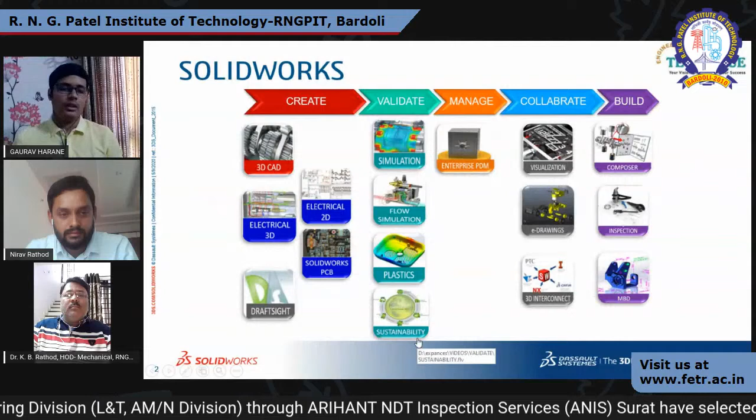So what is SolidWorks? SolidWorks, as we all know, is a very renowned software for 3D CAD modeling. Also, it has Electrical 3D, Electrical 2D, PCB. Then for validation, it has Simulation, Flow Simulation, Plastics, etc. So it is a bundle of different modules which are available. Then we have Manage, to manage all the 3D files and 2D drawings. Then Collaborate, that is Visualize and e-Drawing for creating high quality rendered images. And finally Build, that is if you want to inspect any 2D drawing, or create good marketing reports, so Composer, etc. So there are various modules available in SolidWorks.

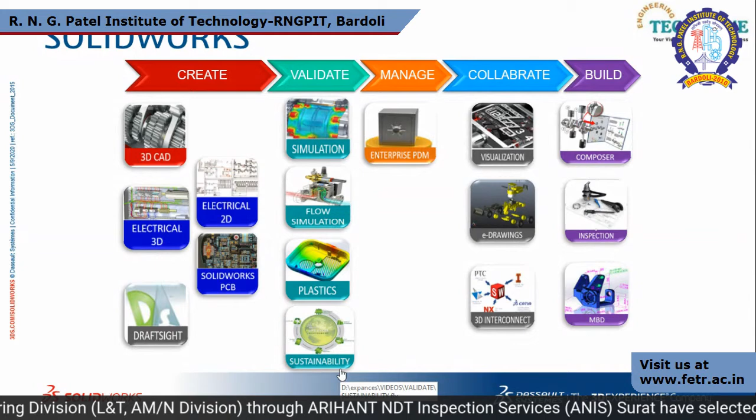So in today's webinar, I will be covering a few of them, like 3D CAD modeling. I will start with 3D CAD, then go into the importance of validation, in which I will show practical case studies which I have done with some customers. You will get a good knowledge of it, and so on.

So, SolidWorks 3D CAD - the power you need to drive innovation. It is a 3D mechanical CAD software, a parametric feature history based modeler. What does this parametric mean? I hope all of you have used SolidWorks in your college. So the 3D CAD software is very user friendly.

Besides 3D CAD, part modeling, 2D modeling, and assembly modeling, it also has industry specific tools like sheet metal, weldment, mold design, surfacing, etc. If a company deals with sheet metal industries, apart from part assembly drawing, it uses sheet metal or weldment. If it is in the mold industry, core cavity, then it uses mold design, etc.

So let us move forward. I will showcase a few of the great functionalities of 3D CAD. This is a simple model of a miter saw, which is used for cutting pipes.

I will jump on to SolidWorks. So this is the model, made up of various sub-assemblies and various parts. Let me showcase a few of the movements which are created.

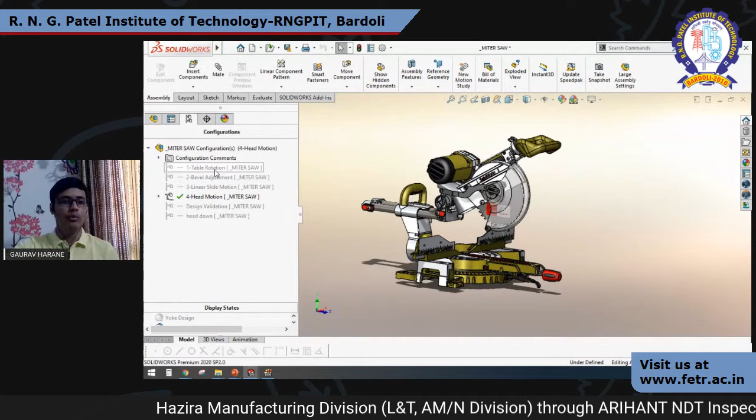Like table rotation, you can create such kind of movements also, which are called configurations. If you want to showcase how this table is going to move, or show how the bevel adjustment is working, the head motion, etc. These are called configurations which can be done.

Now let me quickly highlight the important part in this whole assembly, this yoke part, which is connecting the bevel adjustment to this cutter. This is the part I have chosen, in which I will showcase how quickly we can create such designs.

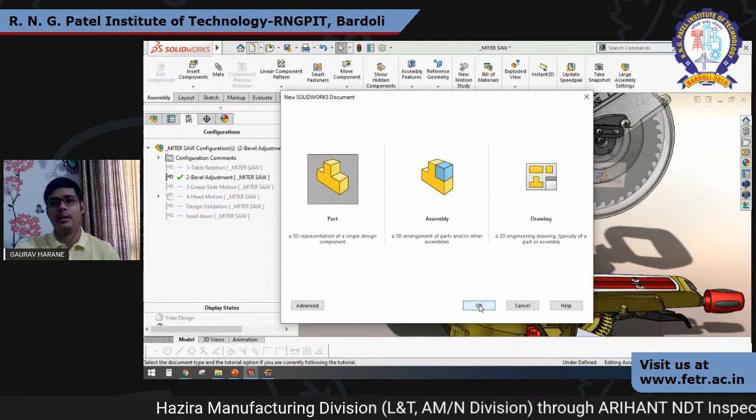We all know we can do part extrude cut, we can draw sketches, so I will not cover those conventional methods of modeling. I will use a few great techniques or shortcuts by which you can create your part modeling in a faster way. SolidWorks starts with part, assembly, and drawing.

So I will go to the part and select the plane on which I want to start the sketching. Now let me use these 2D entities. As we all know, SolidWorks has all the types of 2D entities, starting from circle, rectangle, square, polygon, etc.

So I will start by creating a center line, then provide dimensions to it. SolidWorks also has a great tool to give dimensions which are fully defined. Most of the time, when you try to create a sketch, you sometimes forget to fully define it. Fully define means you forget to give certain dimensions to it.

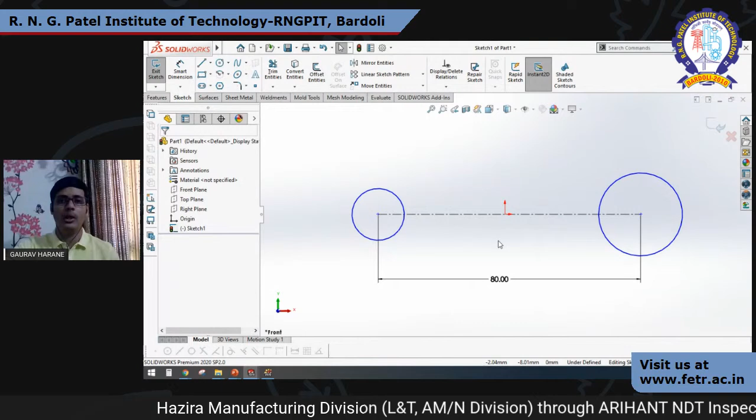That's why it belongs in underdefined criteria, shown in blue color. I have not given a radius to the circle, so it is blue in color. Whenever you do any of your modeling, it is important to give the perfect dimensions so that it is fully defined and no other dimensions are missing.

There is also a list of relations which are available. So if you select entities, like I have selected two circles, you can provide relations to it, like the equal relation I have provided.

Now moving on further, I'll create one more entity and complete my 2D sketch. You can also see at the bottom that an underdefined option has popped up, meaning all the dimensions are not provided. See, the rectangle has turned black in color, meaning it is fully defined.

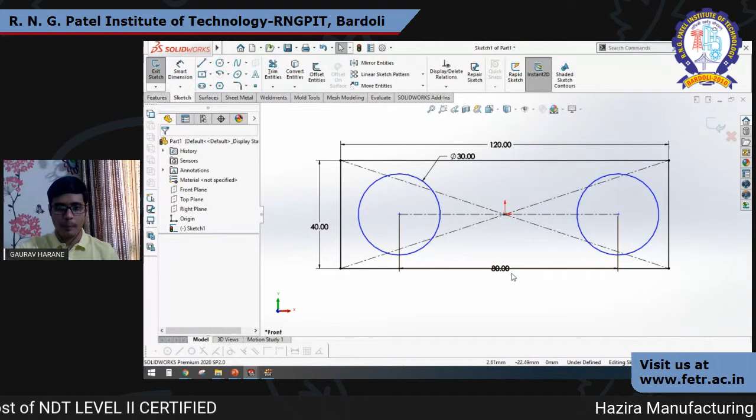But still, the circle is not fully defined, it is blue in color. So I will just give one more dimension. Yeah, this is 40. Now it is completely defined and has turned black in color.

So this is one of the things which many designers miss. They actually know how, but they miss giving a fully defined dimension scheme.

Now once I exit it, I will be in my 3D environment, and with the instant 3D command, which I have highlighted right now, you can directly convert this into 3D. No need to go into the feature, like extrude base, revolve, etc.

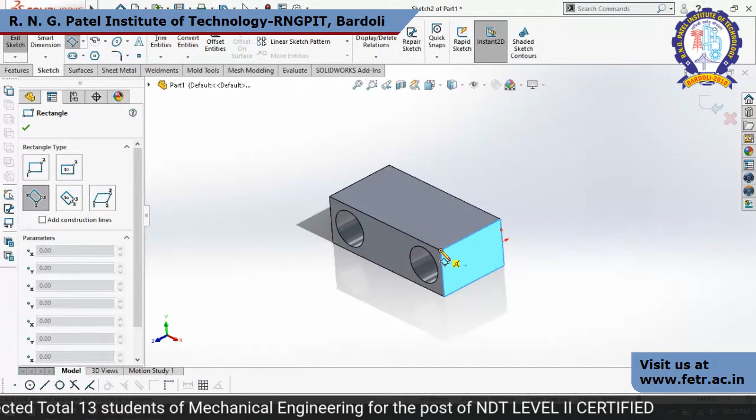Okay, now let me again create one more sketch on this face. This is a very intuitive tool. Many of you have used this, and you have found it very easy.

So I am creating one more sketch in this. I am creating two circles, and I want to dimension this. Again, there is one more shortcut.

You can use the fully defined sketch option to give all the dimensions automatically. No need to provide each and every dimension individually. You can edit them if required. So if you use the fully defined sketch option, all the dimensions will be automatically given, and there's no need to find out which dimension is missing to completely define it.

Okay, now moving forward, once you exit the sketch, we have the contour select tool, in which you can add material to different contours.

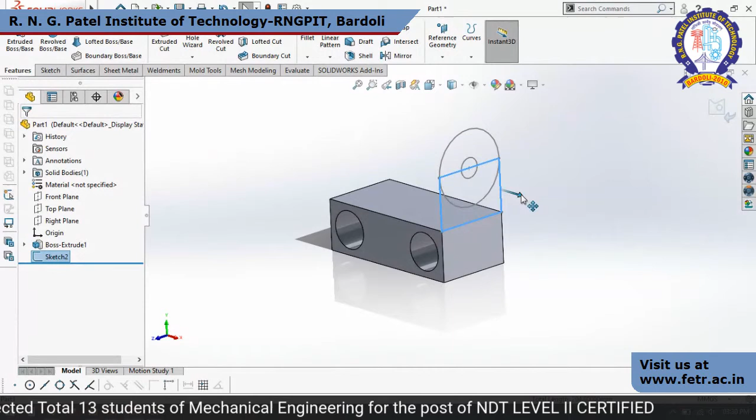I want to add material to this contour. You can drag it in either direction. For example, I'll drag this to 30, and I want to drag this one to 40, and make it hollow. If you drag in this direction, it will add material, and if you drag in the other direction, it will automatically use extrude cut. Isn't it a great tool?

I have not even touched any of the commands at the top of the features, and I've created this within 2 minutes. Finally, I'll use a few more commands and complete the 3D modeling.

I want to make it a mirror, so I'll select the plane, select the body, and say OK.

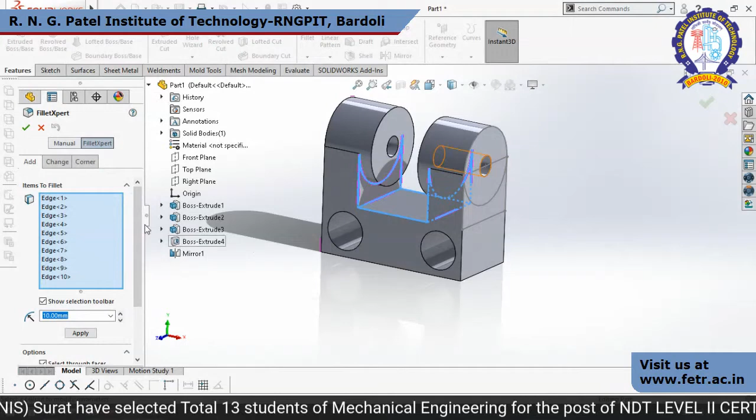Now there are various sharp corners, and we all know we use fillet to remove sharp corners. Whenever you click on one of the edges, the option will pop up showing which edges you want to apply the fillet to, so there's no need to select each edge individually. With the fillet expert command, SolidWorks will automatically show you where to apply fillet, and likewise you can apply the fillets.

Let me select one more and I will finalize the model. I want to apply fillets over here, and you can give the values.

Also, one good thing is you can use the copy paste command. We all know the Control-C, Control-V option we use in Word, Excel, PowerPoint, etc. while creating reports. The same way you can use this here, just by dragging one fillet from one location to another. These are a few good shortcuts you can use to design your products faster.

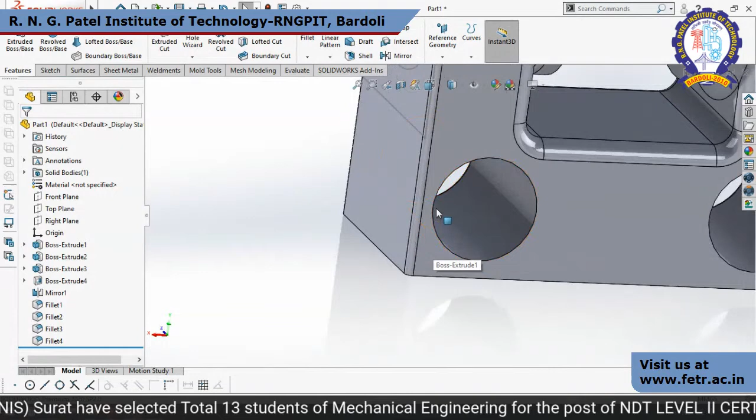I have used the copy paste command here, but if you want to cut paste any fillet, you can also do that. If you press Control and drag it, it will be copy paste, and if you directly drag it, then it will be cut paste. These are a few important shortcuts while you design your model.

Once your model is ready, we can go ahead with the drawing part, the 2D sketching. For that also we have a good set of shortcuts available. Let me go on to the drawing part, or else you can also open it from this option, make drawing.

Let me just save it somewhere, I'll say desktop and save. These are a few tips and tricks you can make use of. Let me again move forward with the drawing part.

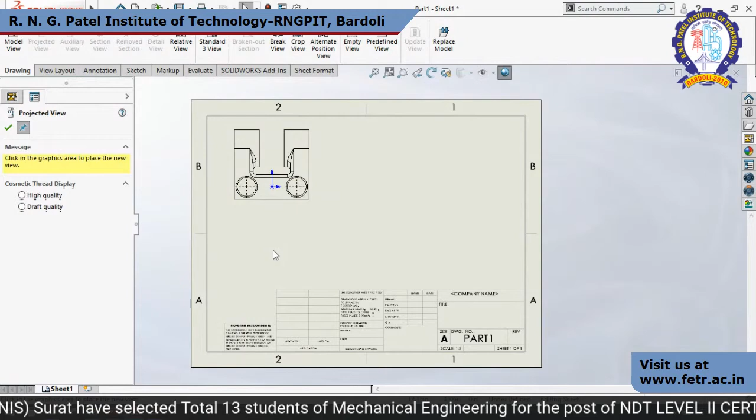I am just creating the different views, and this is my isometric view. Let me change the display of the isometric view and hit OK.

Now drawing, 2D drawing is the language of engineers, so they will understand everything from this 2D drawing. All the dimensions are required whenever you create any drawing. We all know the smart dimension option is available, where you can just pick any edge and dimensions will be provided.

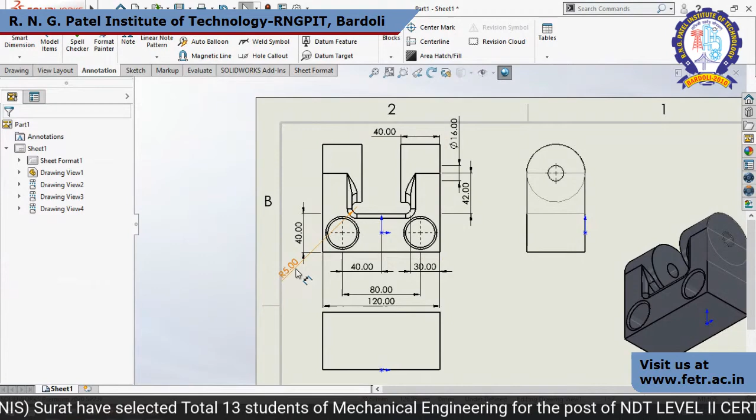Sometimes it's a tedious process to apply all the dimensions every time. With the help of model items, you can just select the view and all the dimensions will pop up automatically, a very time-saving technique, and you can arrange them automatically. If a few dimensions you want to drag here and there or delete, you can do that too. These are a few good techniques to create a drawing in a much faster way.

Also, if we talk about assembly now, I will just cancel this. So if we talk about the assembly drawing now, let me open the assembly drawing for this.

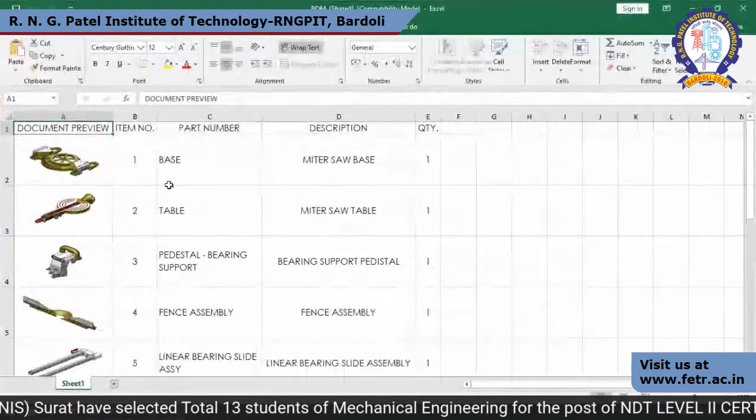Bill of material is also automatically created in this, and ballooning can also be done automatically. But what I want to explain right now is how you can create the Excel file of the bill of material, where you can also incorporate images of the parts with the thumbnail option. Once you save this file, you can create the bill of material in Excel with images coming up, so that whenever this bill of material is forwarded to the concerned department, they can quickly see a preview of what they are actually going to buy.

Without wasting any more time, I'll go on to the next part. This was the very basics of part modeling, what shortcuts we have seen, and let me go on to the next part.

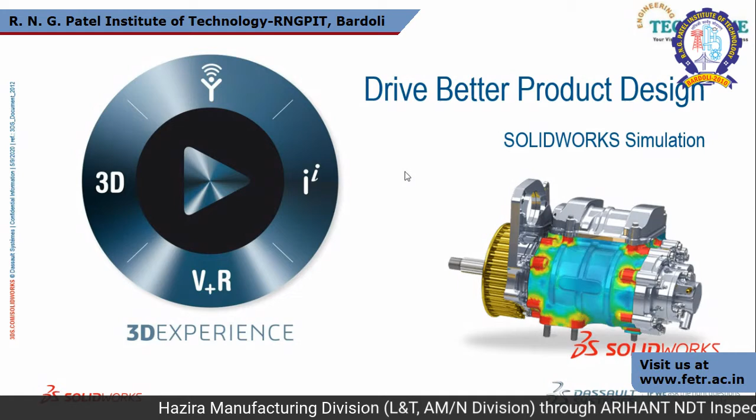Now simulation. How can you make use of simulation in your part modeling or the projects you might be doing? How will simulation help you once you have created your 3D drawing? I have just given you glimpses of 3D, as all of you know the basics of 3D modeling.

So I will cover in this session a few advanced topics like simulation in a wider perspective. Now, FEA - finite element analysis - is a very common term. You might have studied it in your third year or final year.

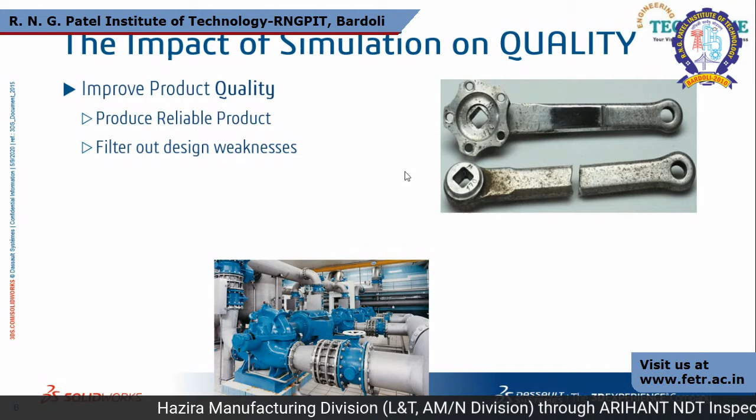So what is the impact of simulation? Why do we do simulation? To improve product quality, to produce a reliable product, to filter out weaknesses. If a model is failing, how will you know once you design it? You will know only by doing analysis or by actually doing practical testing of the part. Many times practical testing is costlier to set up, so we rely on simulation software to filter out weaknesses in design.

You can also predict sufficient product life - how many months or years the product will withstand, what is its life. So these are a few of the impacts on quality.

Then testing is done - meaning the part is tested in the physical environment. Once the part is tested completely, we manufacture and deliver. I hope there is no doubt in this cycle.

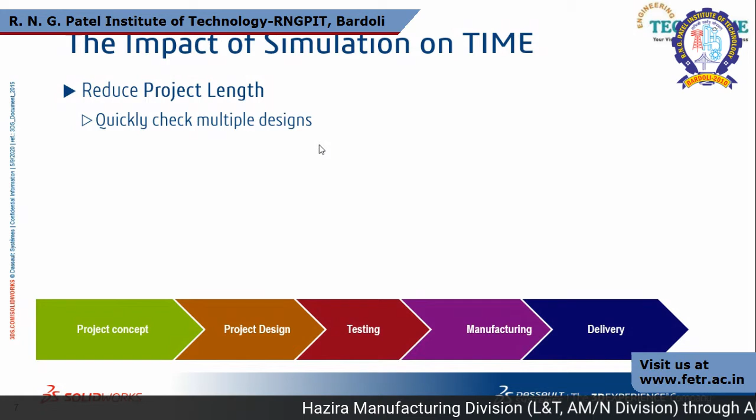So what can be done to reduce this cycle? To reduce the project length, you can quickly check multiple designs. You can design any number of products and quickly simulate and check them. So there's no need to manufacture the same product with different designs every time and then test it.

Then there's earlier detection of potential issues. In the design stage itself, if there are any issues - like the thickness is less, or a rib has less thickness - you will know in the design stage itself. So you can reduce potential issues that would come after manufacturing.

Trial and error process can be reduced. Hand calculation will be reduced. You've all studied strength of materials, where you calculated with various formulas for cantilever beams or simply supported beams, when they will break and so on. But this is suitable only for simple products.

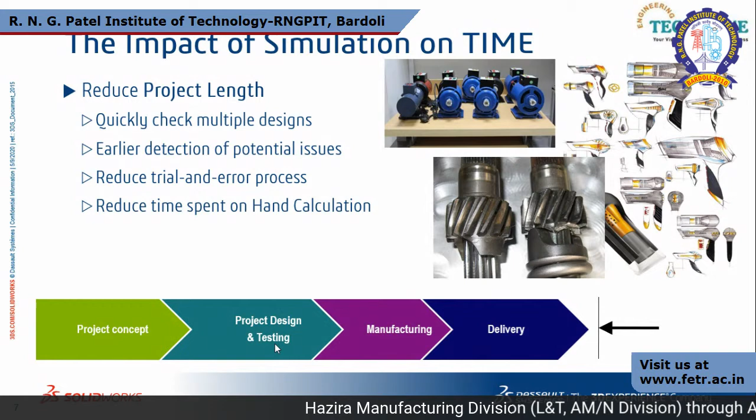Let us move forward to cost. We've seen various project costs occurring - outsourcing cost, material cost can be cut if you use this validation approach. With the help of optimization tools, you can cut material cost, prototyping cost, etc., which will finally increase quality and performance, reduce time, and reduce cost.

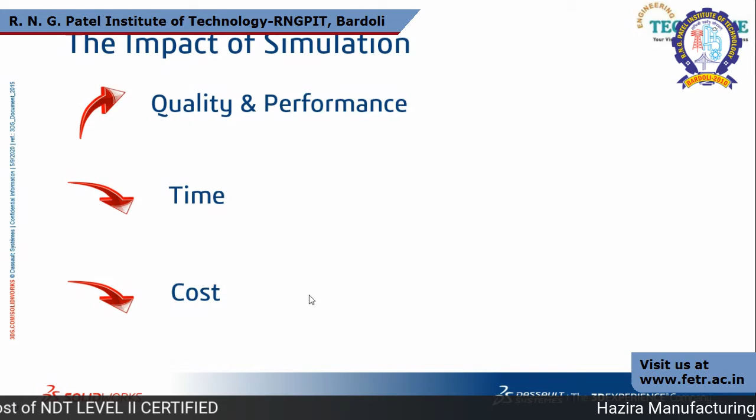So I've given you the general idea of how simulation impacts the design process. Now let's go to the first case study. This is a practical example - I've chosen a very good one so you can understand and relate to it. This is a part we see every day. I'll do the analysis of the crank, the cycle crank.

We have to suggest the customer who is going to buy the bicycle to provide them a preventive maintenance book, in which we say that this part will have to be given maintenance after 5 years, 10 years, or few weeks, etc. So how is this found out? How can we say that this part will last 1 year, 2 years, or 5 years? Let's check that out.

Many systems generate repeated or variable loading, like the bicycle crank, there is repetitive loading. Once you rotate the pedal, it will be loading, unloading, loading. So there is repetitive loading, vibrations are there. These are a few of the loadings coming up on the product which may result in failure.

Now building a great product is very hard. 46% of new product launches sometimes fail. 75% don't meet life goals. 2 years is the average lifespan of a successful product. These are a few points I would like to showcase you. 85% of structural failure occurs through the fatigue mechanism.

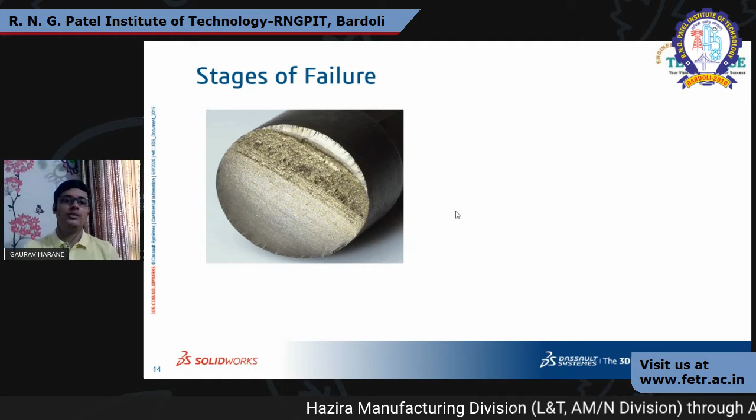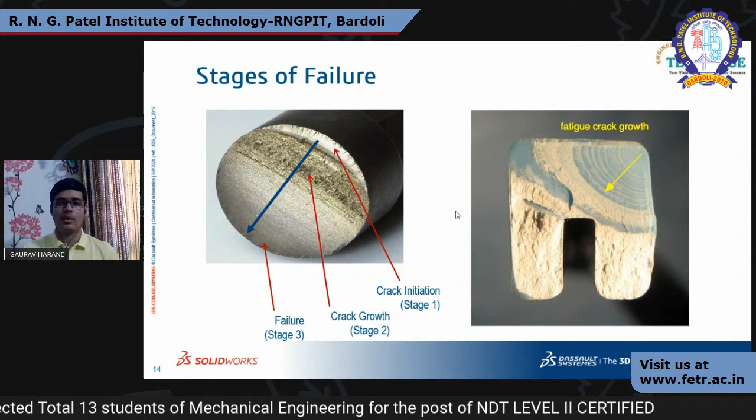Now what is fatigue? You have studied this in your engineering. Fatigue occurs because of repetitive loading, and there are stages of fatigue. The first stage is crack initiation. Because of repetitive loading, the component fails due to fatigue. How will you come to know about the fatigue? It will show some signs like crack initiation, then the crack grows, and finally the failure occurs. These are a few images I have taken from components to show you fatigue failure.

And the cycle crank is the first case study we will be studying. We will make use of fatigue analysis to check how this design is suitable or not, and for how many years of life it will withstand.

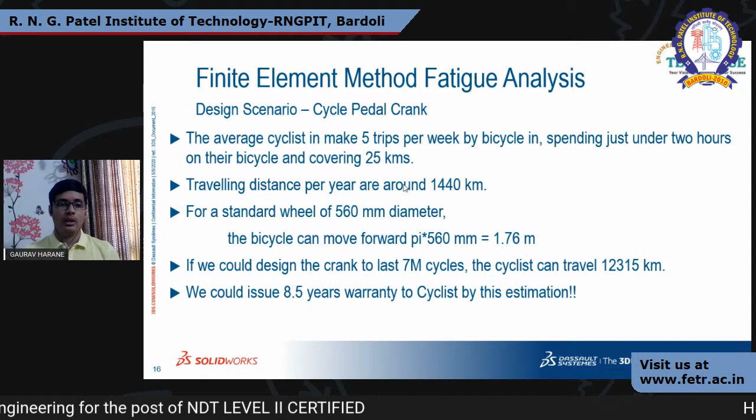So if we could design the crank to last 7 million cycles, meaning 70 lakh loading and unloading cycles, that is my objective. The cyclist can travel 12,315 kilometers - that's the average life of the crank, of the pedal. So we could issue an 8.5 year warranty to the cyclist by this estimation. This is how we estimate the product life, how it is going to be used.

Now we will make use of SolidWorks to design this. We have to find out which crank is better, which pedal is better. I am having 3 designs with me - design 1, design 2 and design 3. The inputs are that it must last 7 million cycles, and the pedal loading coming is 133 kg. Now I am using the worst case scenario.

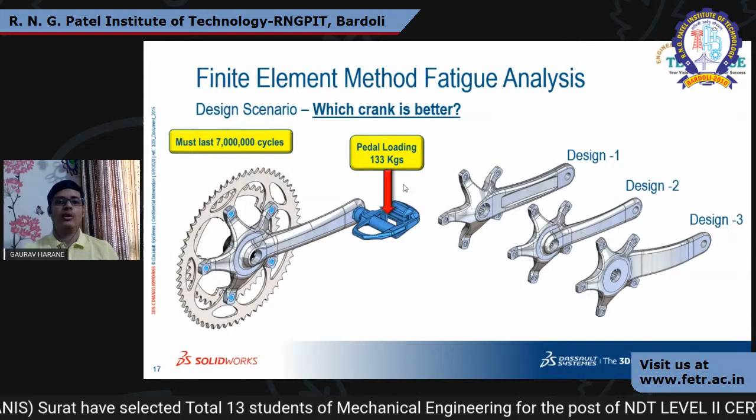We all know 133 kg will not come on one pedal at a time, but still we have to consider the worst loading scenario - what if all the weight comes on one pedal? So we never do the design or analysis considering the actual condition. Let us move ahead. So this is my pedal, this is how it is going to function. No doubt about it.

What I have done over here is the model simplification. I have removed all the chain and sprocket mechanism and simplified it for analysis purposes.

Let me move ahead in the software to check how you can make use of this. First let me showcase you how the modeling is done. So this is my crank design. This highlighted part is the pedal, and these are my sprocket mechanism, which are all assembled.

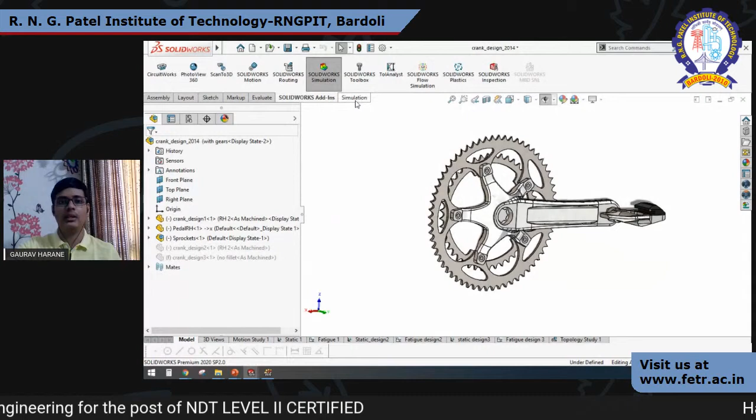We have various add-ins available. You are all aware of the assembly module, and there are add-ins available at the top - if you want to do simulation, you can click on simulation and the simulation functionalities will be activated, and the same for flow simulation.

So what I have done is simplify the design. I have removed the chain and all the gears which are not required. I am having with me 3 designs - first, second, and third. I want to check which design is suitable and fulfills my criteria of 7 million cycles. Let me start with the first design.

Whenever you create a new study, you have various options like static, frequency, topology, and some advanced studies like fatigue, non-linear, etc. You can select the study accordingly.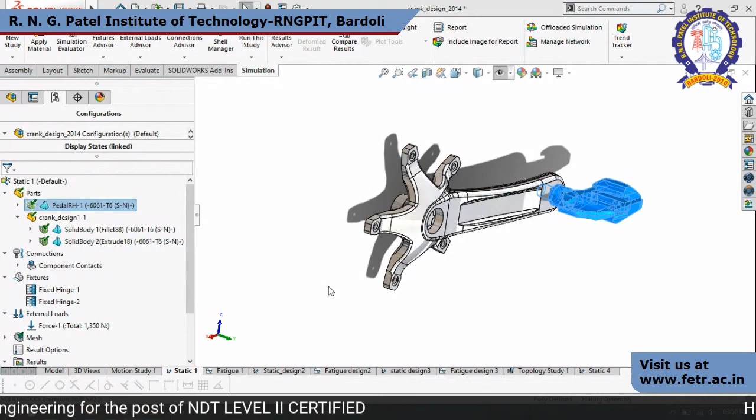Okay, so this is my study. The first thing you do is apply the material. SolidWorks has this material library inbuilt. Those who have worked on SolidWorks would know this material library is available with all the steels and all the materials.

Once the material is given, we apply the fixture from where it will be fixed. The fixtures are applied in all these holes, and force is applied over here. The force is applied in the downward direction, 1350 newtons.

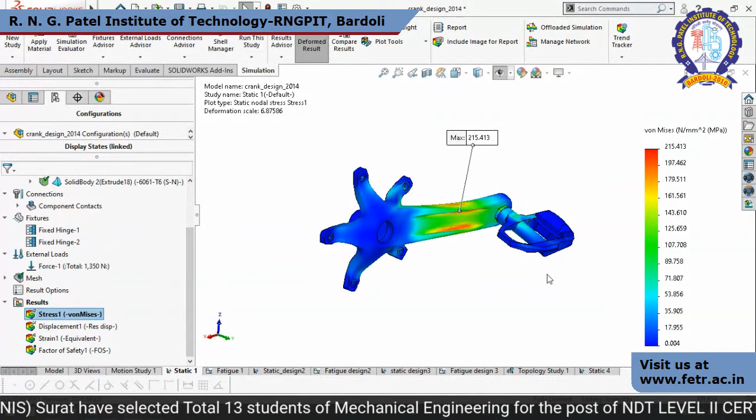Finally, once we run the study, you will get the results. You will come to know what is the maximum stress. It is 215 MPa. And if it is failing or not, how will you check? At the bottom, you will get to know the yield strength of the material, which is 275. So it is less than 275, meaning the maximum stress is safe.

Similarly, you will get displacement results. The displacement is coming to 4.28 mm. Also, you can have the animation of it, showing in which direction the displacement is coming.

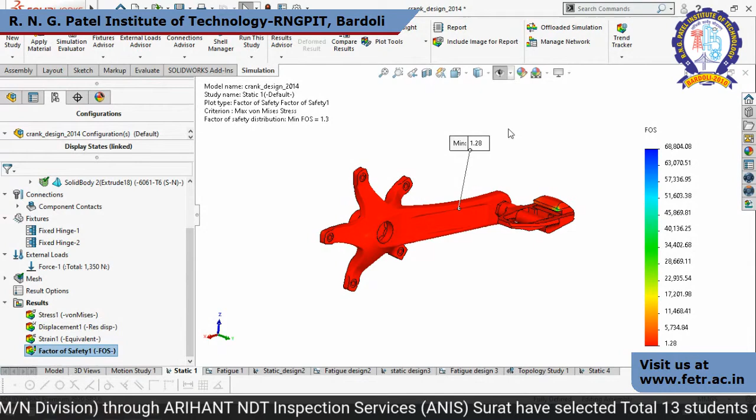And factor of safety, in my case I'm getting 1.28 FOS. Again, factor of safety is just a factor. So what does factor of safety tell you? If you increase the load by this factor, your component will not fail. But if you increase the load by more than this factor, then it will fail. So this is the idea the safety factor gives us.

Now let me move on to do the fatigue analysis on the same part. I want to know how many years or how many number of cycles this product can withstand.

Whenever you do fatigue analysis, you will have to give the SN curve, that is stress versus number of cycles curve. As number of cycles are increasing, the stress is reducing. So this curve is very much important, and then you will get the product life.

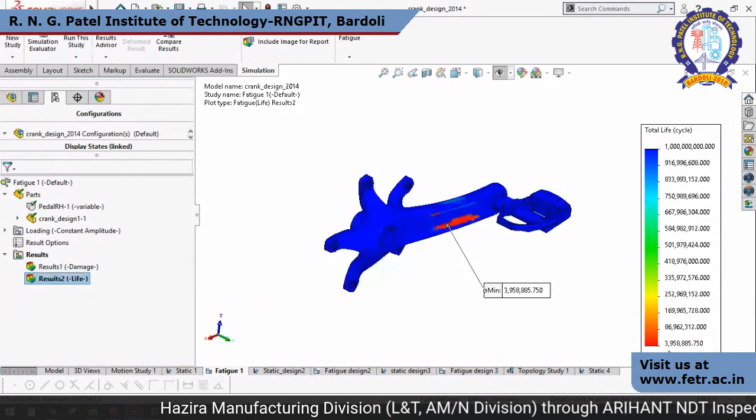So what is the product life that you are getting? It is 3.9 million, right? 3,958,885 number of cycles.

So these are the things I got from the first design: the minimum durability cycle is this, the stress is 215, the minimum factor of safety is 1.28, and the maximum deflection I got is 4.2.

So this SolidWorks Simulation also helps you quickly check multiple designs. I will jump on to the next configuration now, and with the same set of boundary conditions I will find out the results. Only the design is changed, rest everything is same: the stress, displacement, and factor of safety.

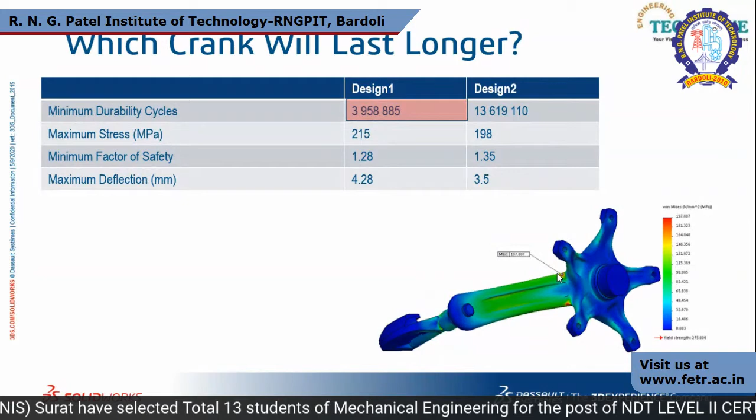So these are the results of my second design. Let me again highlight what is the fatigue life of the product you are getting. It is 13 million cycles, which is more than our input requirement of 7 million cycles. So I think this product is safe, whereas the previous product had 3 million cycles, which was not satisfying our criteria. So quickly you can do multiple design checks.

And finally, I will go on to the final design. In this design, there is a small change. There is a bend given over here, a slight small bend.

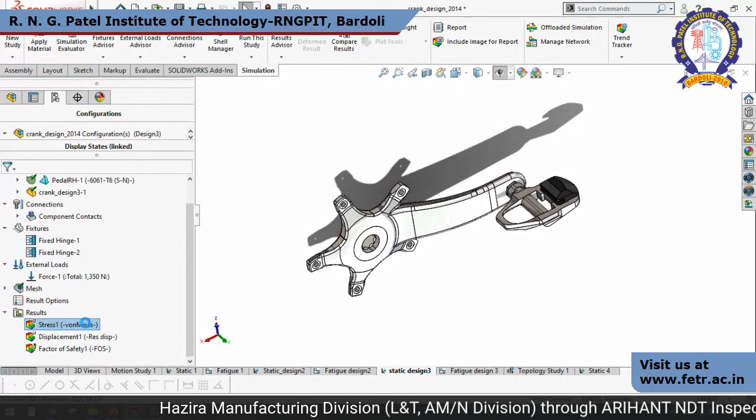And these are the results. The stress is 248 MPa, the displacement is 1.8, and the FOS... And if we have a look at the fatigue study, the life is only 1.3 million cycles, which is very, very less.

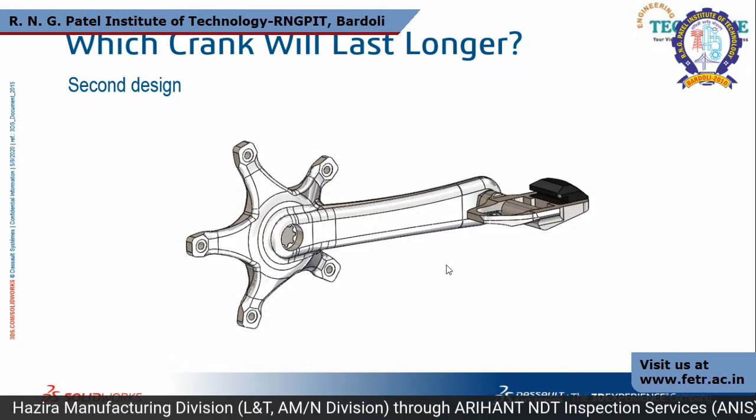So with these three designs I have taken into consideration, I came to know that the second design is fulfilling my criteria of 7 million cycles. So we can go ahead with the second design for manufacturing. This is the benefit of validation: you can quickly check multiple designs and come to a conclusion about which is the best design to go ahead with.

Now, structure, material, and stiffness. There are a few conventional manufacturing processes like milling, turning, grinding, etc., for how to manufacture the product. And there are some advanced manufacturing processes like 3D printing, in which we manufacture the product not by cutting it, but by adding material to it. These are subtractive and additive manufacturing processes, the two basic manufacturing processes.

Now subtractive and additive - I have just shown you how these differ from one another. With subtractive manufacturing, size optimization and shape optimization can be done. With additive manufacturing, you can do topology optimization. You can cut holes or change the shape which are not standard, right?

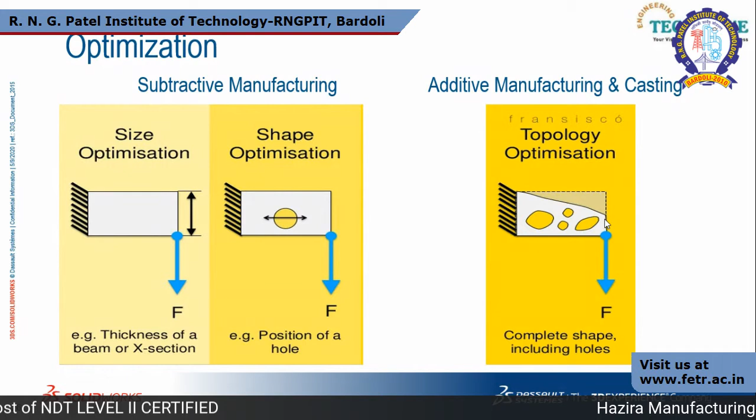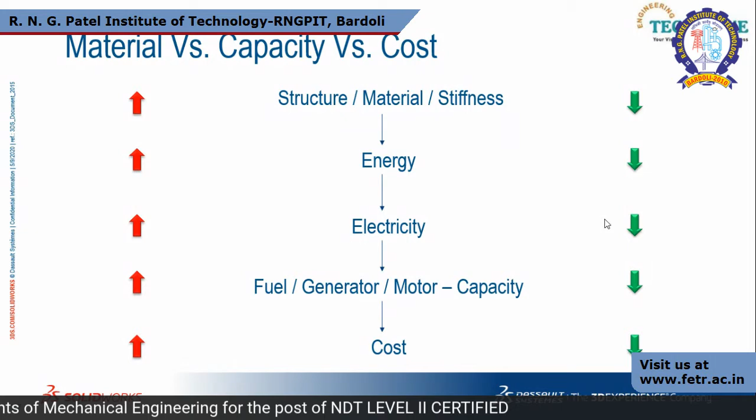So if structure, material and stiffness is less, then less energy is required, less electricity is required - everything will be less. So if your part is light in weight, if you create an optimized part, then the energy, electricity and everything is less. Simultaneously, finally the cost will be less if your product is optimized. So if all those increase, finally the cost will increase, and if all this is less, the cost will be less. So you have to produce an optimized product.

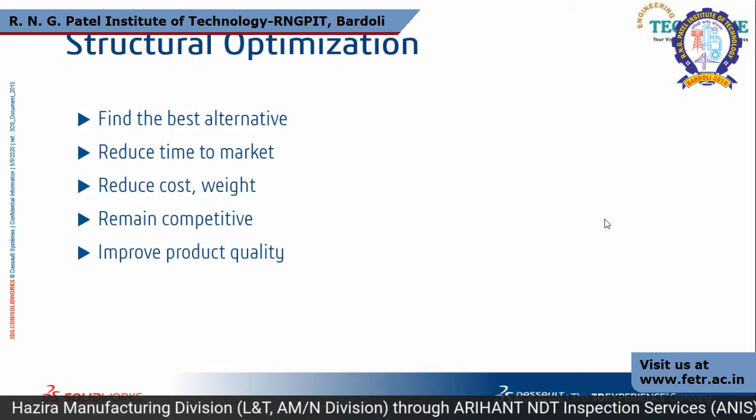So structural optimization I am going to discuss. You can find the best alternative, reduce the time to market, reduce cost and weight, remain competitive, and improve the product. Now we have one more module of optimization in SolidWorks - shape optimization or topology optimization. So if you recall the crank, the second design was the final design what you have proposed, right?

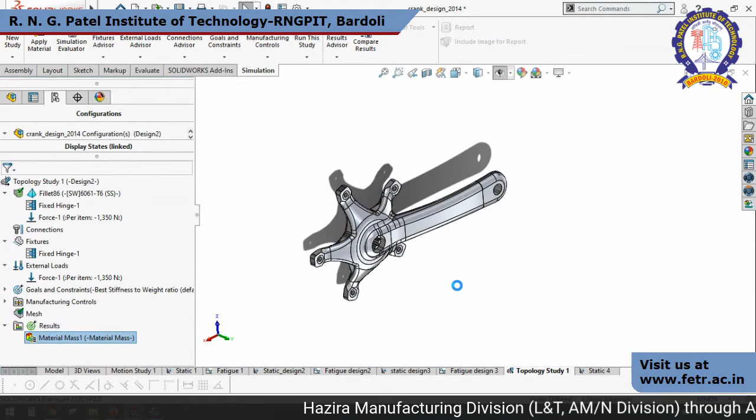Now we can do more weight reduction in this by performing topology optimization. Let me just activate this - yes. So what I have done, I have reduced the mass, keeping in mind that the part will not fail. Or else what is the use of mass reduction if it fails, right? So you can give different goals here, like reduce the mass by 30% or whatever percentage you want to reduce the mass. So the current mass before reduction was 0.4 kg, and after 30% reduction it is 0.28 kg.

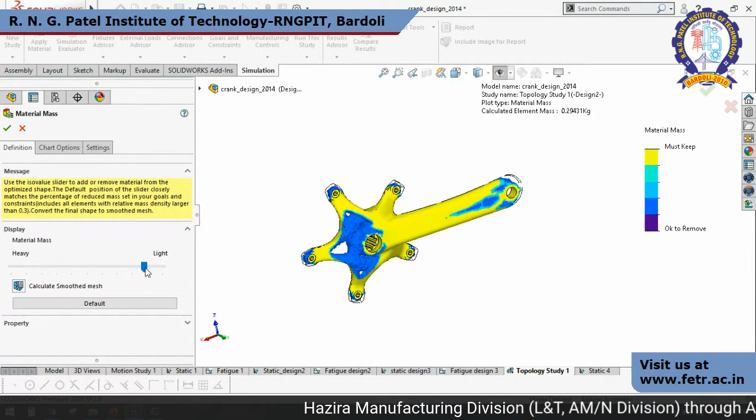Let me just highlight you - yes, so by changing this slider you will come to know how much mass you can remove. Now if I change my slider to the light side, it will remove more mass. Also, it is telling you few points, like which regions you must keep and which regions you can remove material from.

What we have done - the initial weight was 402.86 grams, and I have made it 303.36 grams, which is 25% mass reduction. So you can reduce the mass also by taking help from topology optimization, which is inbuilt.

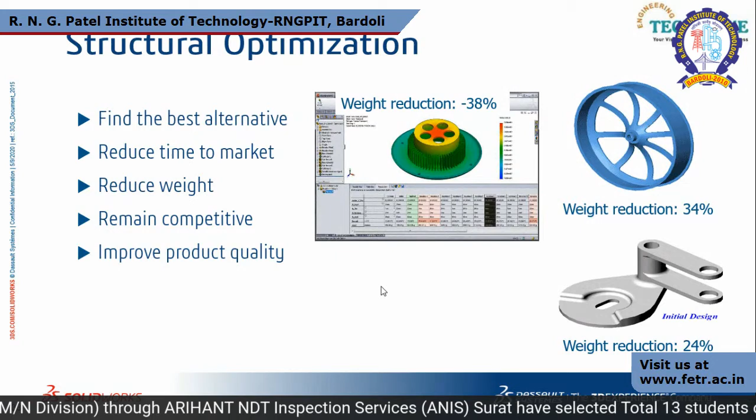So what are the benefits? Again, I'm repeating the same things - remain competitive, reduce the weight, reduce the time to market, improve the product quality, etc. So these are a few examples where structural optimization is majorly used. So mass optimization saves money without compromising the quality.

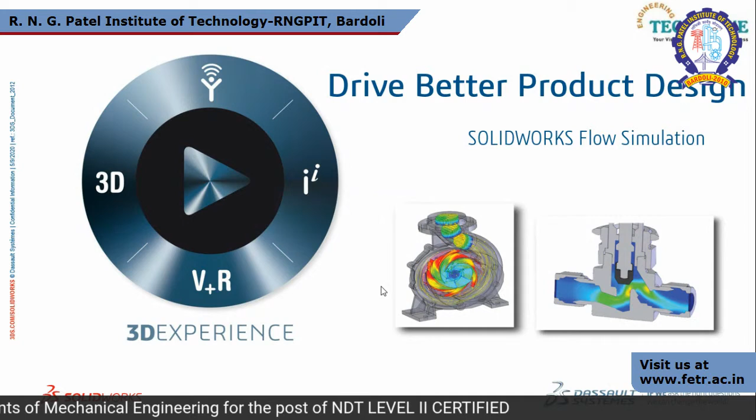Now let us go ahead to the next module, which is CFD, flow simulation. So what we have checked until now is 3D CAD modeling, structural analysis, fatigue analysis, and topology optimization to change the shape of the product. So the next module is flow simulation - what does this flow simulation do?

I'll give you one case study to explain it. We all know heat exchangers, right, so I don't need to explain its function. In a heat exchanger, there is an exchange of temperatures - cold fluid comes in, hot fluid comes in, and temperature is exchanged. So you can also simulate those things in SolidWorks, to see how the temperatures are affecting the model or the tubes.

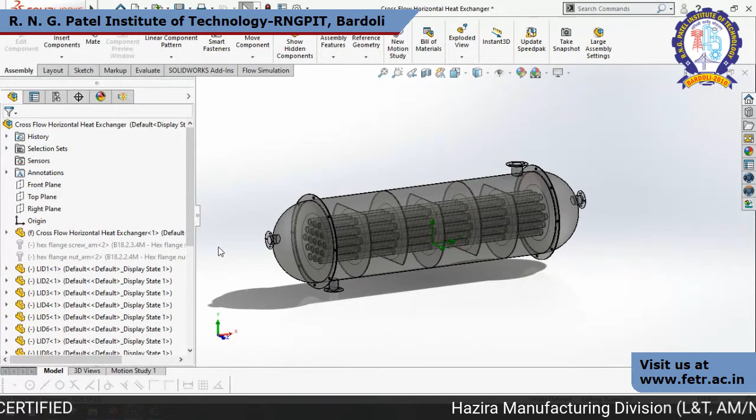Now we have seen SolidWorks simulation add-in. You can also switch on to flow simulation to check how the fluid - it may be air, liquid, or gas - behaves when it enters the model, or enters any valves or pumps, for example like a heat exchanger.

Okay, so over here, what I have done, I have created domains where my fluid will be flowing. For example, you can see this region, blue color region with the tubes. There, water is flowing with the temperature of 40 degrees Celsius, and velocity of 0.5 meters per second.

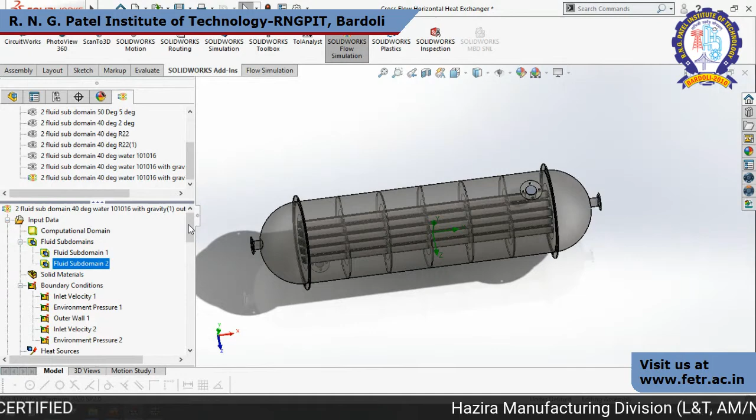Similarly, there is this next medium in which it is water, but it is at 2 degrees Celsius. From here, it will go out with the velocity of 5 meters per second. Right? So these are my inputs.

And then you can set a boundary condition like what is the inlet velocity, and this is connected to environmental pressure, and the conductivity of the outer surface area, and the second inlet velocity and environmental pressure. And then you can set up goals. If you want to measure the temperature at this area, or at different regions, you can calculate or find that out.

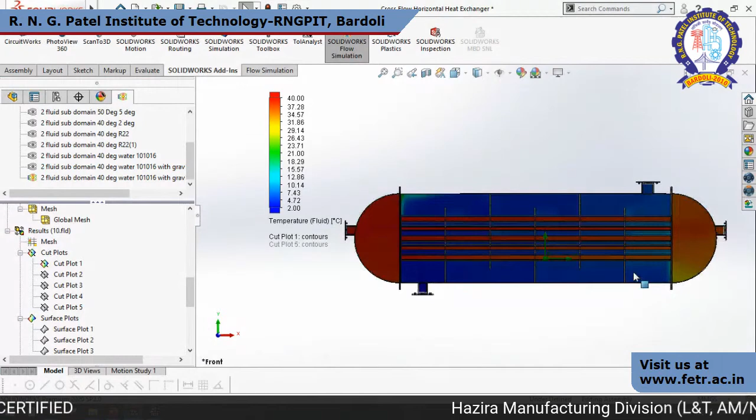So let me just show the plots. So this is my cut plot, showing how the temperature distribution is taking place. Here the water with 2 degrees Celsius will be flowing, and from here water of 40 degrees Celsius will be flowing. So you can clearly see the temperature distribution is given here.

And also you can create flow trajectories to it, so you can check how the fluid is flowing within the model. Then let me just play, so it will highlight you how it is flowing.

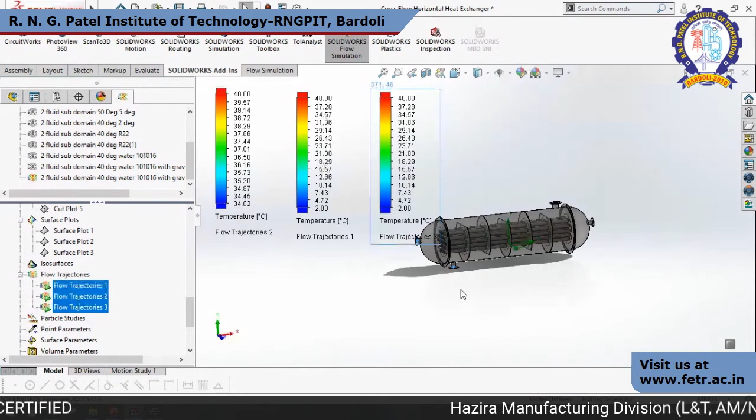Now let me go on to the second case study of solar panel. We all know solar panels, so it is one of the renewable energies where we use, and for that we have to design structurally that the component is safe structurally. There should not be any failures. If the wind is flowing at certain meters per second, it should withstand those effects.

Okay, so over here I am having the model which I have designed in SolidWorks. So there is structure and different ground planes I have created, and I have just patterned it.

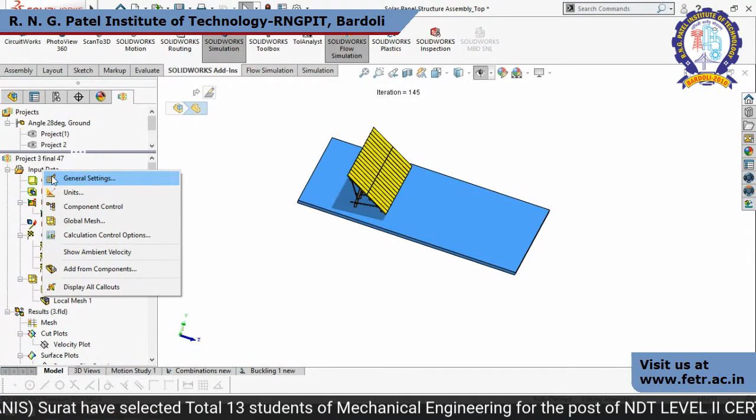Again, coming back to the analysis. So let me just showcase you the input conditions what I have given. The air I have chosen as the fluid, gases, it is air, and it is flowing at the velocity of 42 meters per second in this direction. You can check the arrow.

So what if the wind is coming in this direction, whether the structure will take the load or not? So that thing you can do. Let me showcase the results. Here are the results, so you will see here what is the velocity coming up. Also you can probe the results if you require at any area. So we can see clearly the maximum velocity is coming at these two regions.

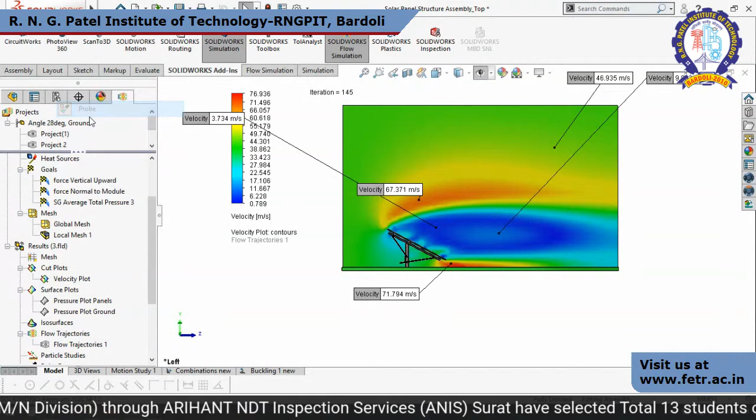Let me just hide this, hide all the probes, and showcase you the next set of results. What are the pressures coming up? Now the pressure will be coming up at the back side of the panels, because of the wind force coming from the back end. So I have plotted the pressure plots also.

So let me just hide the panels so we can see the results, hiding each and every panel. So this is the pressures plot what I have created. The maximum pressures are coming up on these panels, so the uplift force will be occurring. And the minimum pressures and maximum pressure distribution you can check clearly here. Okay, and let me again just unhide all these panels for you.

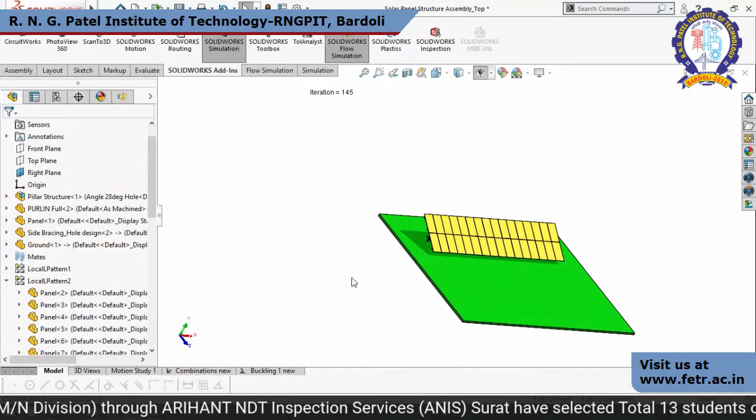Similarly, what if the wind speed changes every time? We all know wind is not constant, it will be changing. I have used here 42 meters per second, but what if the wind speed changes? So you can carry out a what-if analysis in which you can specify different speeds of wind. I have taken 42, 29, 49, etc. You can take n number of speeds of wind and then check the result.

What is the vertical upward force coming on each of the panels, normal force coming on the panel, etc. And from there you can specify that the wind loading capacity of this solar structure is, say for example, 50 meters per second, so beyond 50 meters per second it will not withstand. So you can conclude like this, or else you can increase the rigidity or strength of the model.

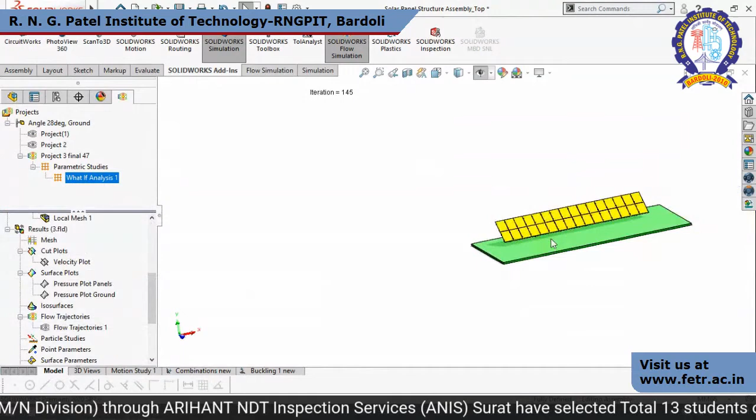One of the great advantages of flow simulation is you can directly export the result to simulation. So the output of flow simulation, you can take it as an input in structural simulation. So once you create your structural analysis, this is my structural analysis window. I have taken one study, and from here you can import those results, including fluid pressure effects from SolidWorks flow simulation. So you can take the CFD results and use those output results as an input in structural analysis. These results act as an external load.

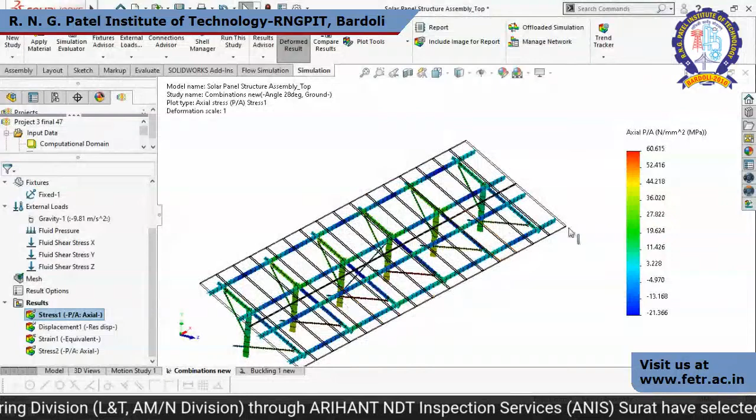I have not only given the gravity load here, let me just show you. I've just taken gravity load in the minus Y direction, and these are the results, showing whether the structural members would take the load or not, what stress is coming up, and what displacement is caused because of the wind force. Let me animate so you'll have a better understanding of the results. I'll just change the angle. This is how the structure would behave when the wind is coming from the backside of the model.

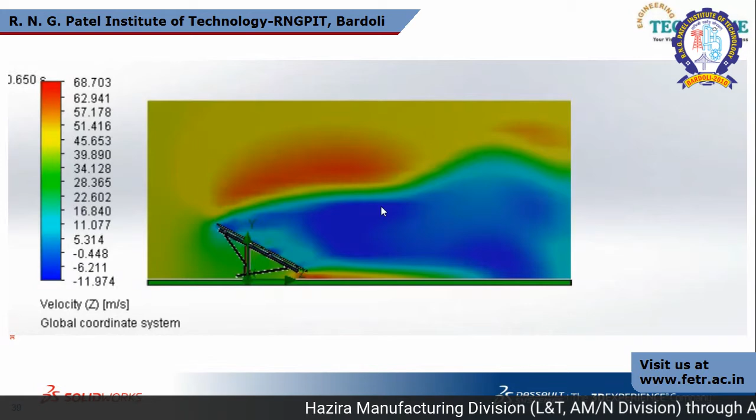So let me move forward. We have checked the velocity plot, and you can create transient analysis also with respect to time. I have done this for a 1 second duration, so you can see how the velocity is changing with respect to time. And this is the pressure plot that we have seen.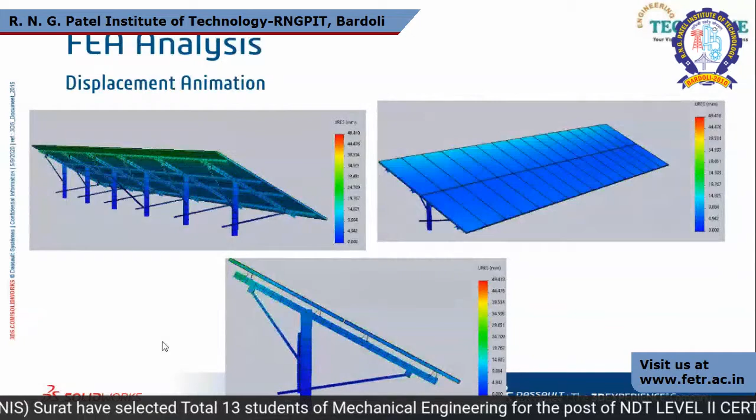You can even do solar farm analysis. So I have just created the pattern of the structure and then done the analysis. Once your structure is safe, you can do the CFD of the entire solar farm as well, like we are seeing here. We have also seen structural analysis, using gravity load and CFD results as an input, and done the analysis. These are the images of the same, showing stress, displacement, etc.

Now, once everything is completed, we have started with the 3D modeling, then did fatigue analysis, structural analysis, CFD analysis, and your product is now safe. Then what do we do? We can go ahead with the technical documentation. We also have one more thing called SolidWorks Composer.

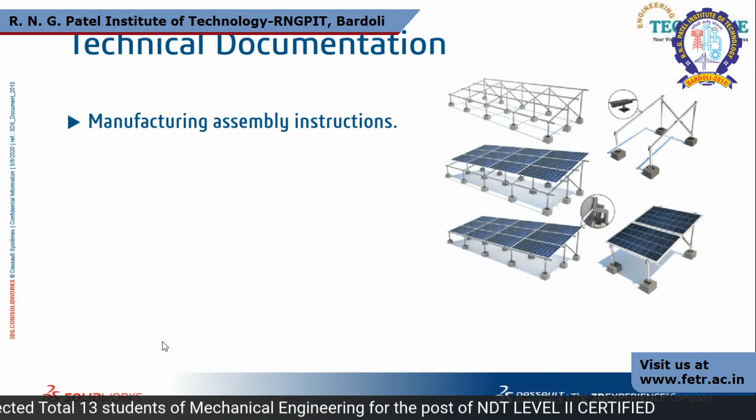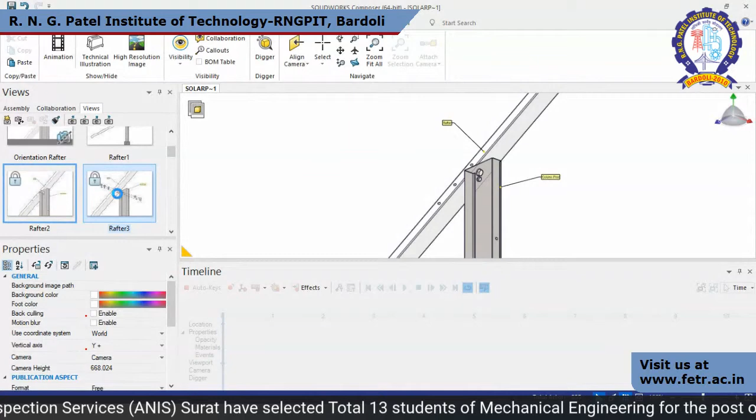It is one more add-in by which you can create manufacturing assembly instructions, installation instructions for how this product is going to be installed at the site, and maintenance and repair guides. You can do all these things here. Let me highlight those for you. This is a very good software called Composer, in which you can create good installation or maintenance manuals by defining different positions, as I have created here, showing how the nuts and bolts are going to be assembled, how you can disassemble them, which channel will be assembled to which channel, and you get results in Word, Excel, or even a web page.

Different technical documentations can be done, so you can specify that first the bolt will come in, then the washer, then the nut will come in, etc. So this is solar mounting system, showing how you can make use of SolidWorks Composer to do the technical documentation.

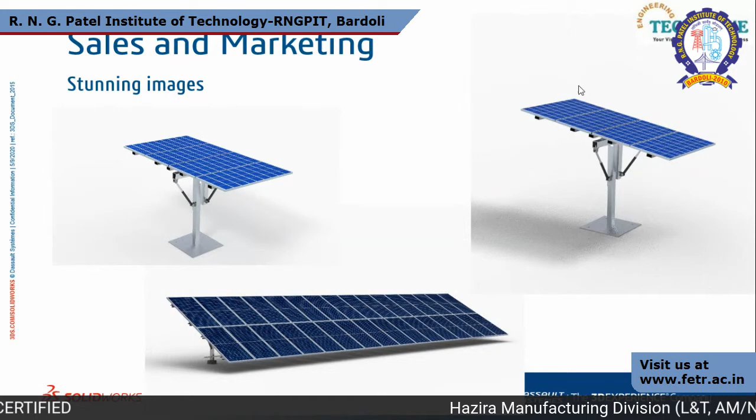Now that the documentation is done, we have to do high quality rendering for marketing and advertisement purposes. For that, there is SolidWorks Visualize available, which is again SolidWorks software in which you can create stunning images for marketing purpose, for sales and marketing. These are some examples which I have created using SolidWorks software.

These are all CAD models, and I have done the rendering of all these parts in SolidWorks Visualize. You can see how clearly all the details are shown. These are all CAD models only.

The advantages are that you can create photo quality images and interactive 3D content to bring your product to life. It also improves internal design engineering sales review to help make more educated final decisions, and delivers photorealistic imagery with content to marketing much earlier to help promote products.

So before your product is manufactured, you can start marketing activity. Once modeling, analysis, technical documentation, and rendering are all done, you can manufacture the product as well, or manufacture a prototype of it to have the form and finish of the part. You can use the future of manufacturing, that is 3D printing. So the last part of my presentation is 3D printing. How SolidWorks will help in 3D printing, we will check here.

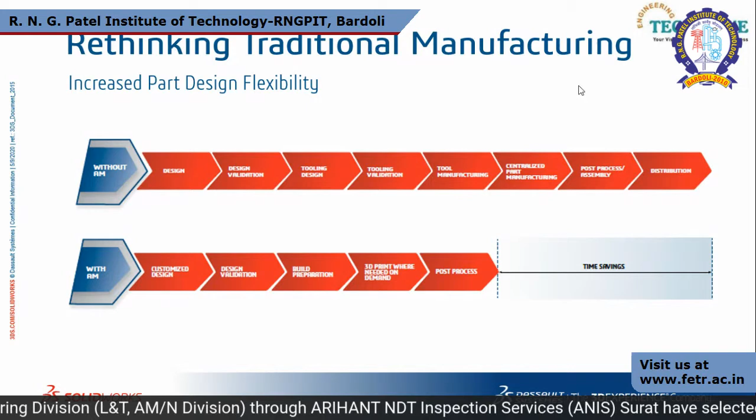There are two procedures I have shown, without additive manufacturing and with additive manufacturing. How is it different? The first one is simple: you do design, validation, then tooling design, tooling validation, then manufacture, etc. But with additive manufacturing, you do design, validation, and just 3D print it. There is no need for tooling design, tooling manufacturing, etc., which is again a time-saving technique.

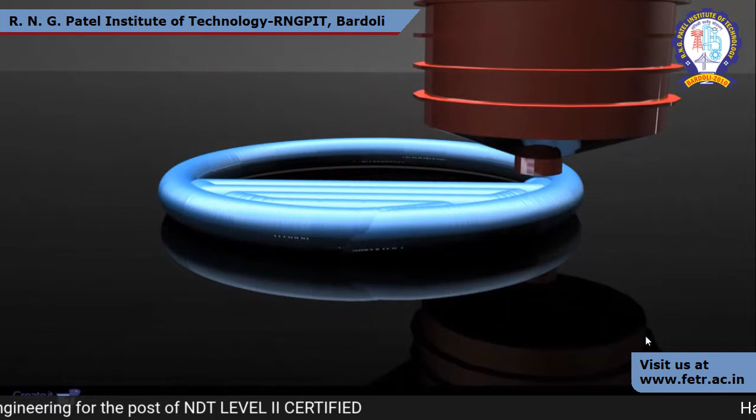Now, working towards the next generation of product, I will highlight how this 3D printing works. This is a simple technique called FDM, in which the raw material comes in wire form, it is melted, and then created by printing one layer above the other, and the table moves downward as the height is adjusted. I hope you are all aware of this simple 3D printing manufacturing process.

Now, how does SolidWorks help you in 3D printing? Let me highlight that. I will jump onto SolidWorks and go back to my model. So I'm just opening the model from the assembly.

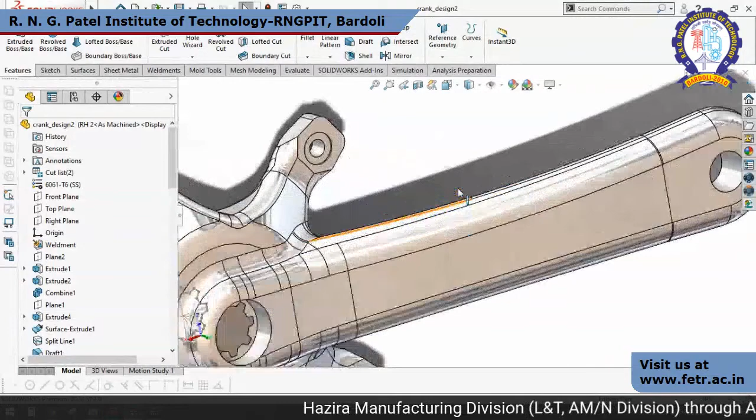So this is my crank. I have given the material as 6061 T6. You can see how perfectly it shows the color of the material as well. So I was talking about 3D printing.

Here is the option print 3D. SolidWorks has an inbuilt database of various printers, consisting of a few renowned manufacturers of 3D printing machines like 3D Platforms, 3D Systems, etc. You can select from here. You're also having EnvisionTEC, Perfactory or Micro Plus, Extreme, Vida, etc. You can select from here.

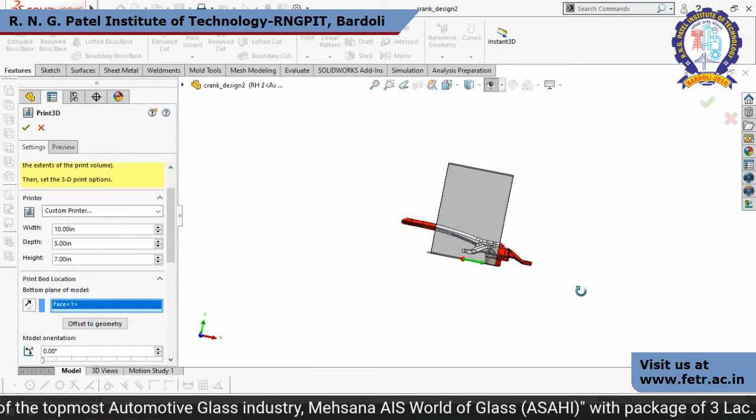Or else, if the machine is not available, you can create a custom one by selecting the bottom plane of the model to determine how your model will be printed. This is my bed volume, so you can insert the bed volume height, width, and length, and check whether your model can be printed within your bed volume.

Or else you can say orient to fit, so SolidWorks will automatically decide the best position for the part to be printed. You can even scale it, so in the build volume it will scale up the model and print accordingly, covering the whole area. You also have the option of infill, deciding how much percentage should be solid and how much should be air, etc.

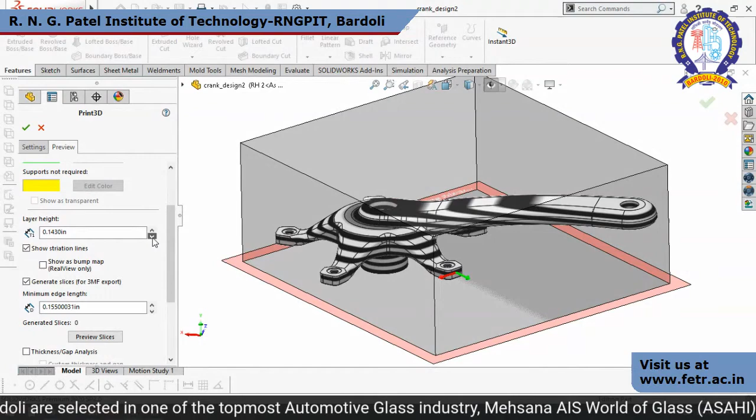There are various options like show striation lines, which is the layer height, so if you reduce it the layers will increase or decrease as per convenience, along with material settings, etc. Show preview slices will display the model in sliced form. So there are various options you can make use of to print your model.

So we have seen this. Now, what is the role of my company with engineering technique during this COVID-19 outbreak? We manufactured various medical face shields in our office for hospitals, medical staff, security personnel, government officers, etc. It is used to protect eyes, nose, and mouth, and we printed this in-house.

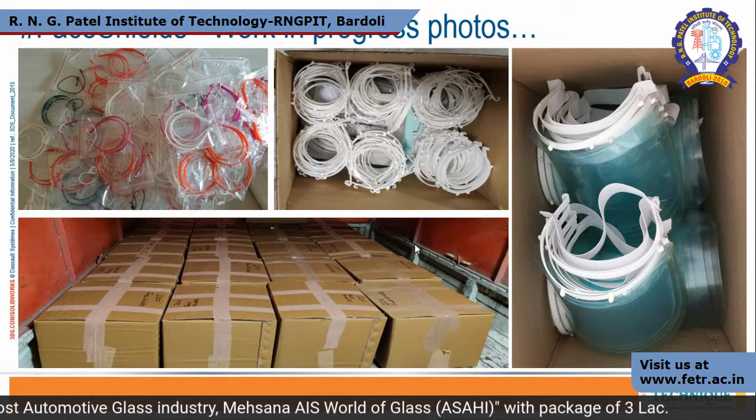So this is the work in progress. I guess till now we have supplied thousands of face shields all over India, not only in Vadodara, but also Delhi, Hyderabad, etc. We have also received media coverage, and in a few articles our names were published.

Also, we have designed and printed a door opener to avoid touching it with your palm. In this outbreak it is very important that you should not touch any object, so this is another innovative thing we designed in SolidWorks and printed in-house.

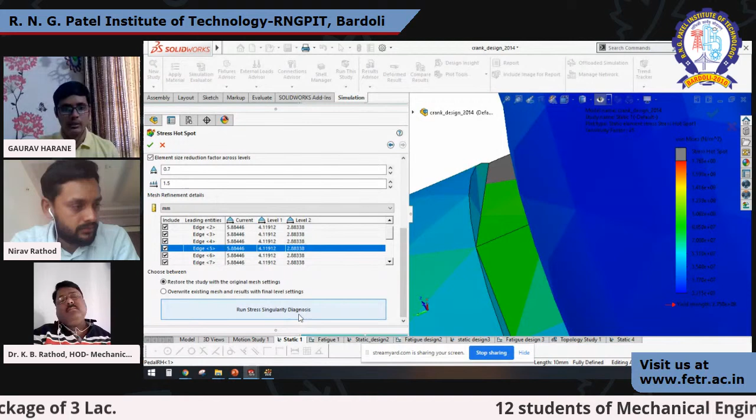It will tell you the current value and what value it should be reduced to, for example. You can also run a stress singularity diagnosis, and it will highlight the edges where stress concentration is occurring. On that region, you can work and go ahead with the analysis if any are occurring. I hope I've answered the question.

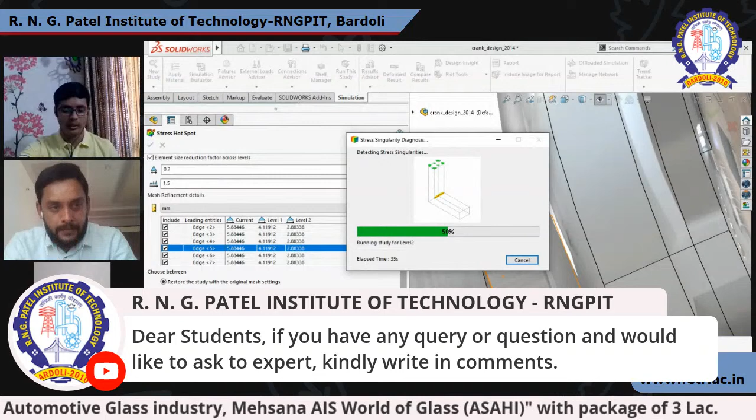Is there any next question? Sir, I have one question related to 3D printing — how much do we have to wait for a metal 3D printer in our region, meaning Gujarat or India, because they are too costly?

Actually, at Engineering Technique we have a tie-up with Markforged, which is a 3D printing manufacturer for metal, carbon fibers, etc. So if you have any queries regarding metal 3D printing or composites like carbon fiber, you can contact us directly.